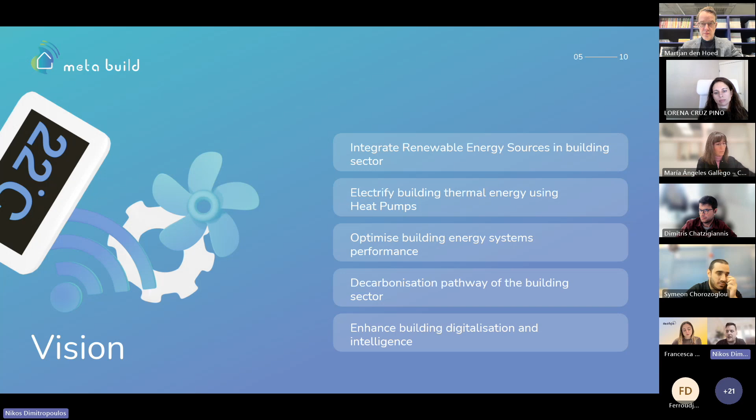Here you can see the consortium. We have representation all throughout Europe. And we can go a bit with our vision. What we try to achieve, in one sentence, is to power the electrification of buildings mostly through heat pump solutions, along with integration of renewables and the accompanying digital solutions. To do this, we optimize building energy system performance. We aim to find pathways to decarbonize the building sector by enhancing building digitalization and intelligence. So we combine hardware and software solutions to do this.

As we are wrapping up our second year and we are a hardware-focused project, here you can see some prototypes of what we are installing in the buildings, along with, on the top left, MPC, model predictive control. So here you see three heat pump solutions. The R290 brine-to-water heat pump on the left corner, on the right corner the dual source sink heat pump, and above the R290 monoblock unit. These are just 3 out of the 6 heat pump technologies.

You also see the photovoltaics, the renewable solutions that we are utilizing, PVTs with direct lamination and air-based PVTs, and the second life batteries. So this is just a glimpse of what we are installing in the project, in the pilot buildings, the front runners and the replicators, to electrify buildings.

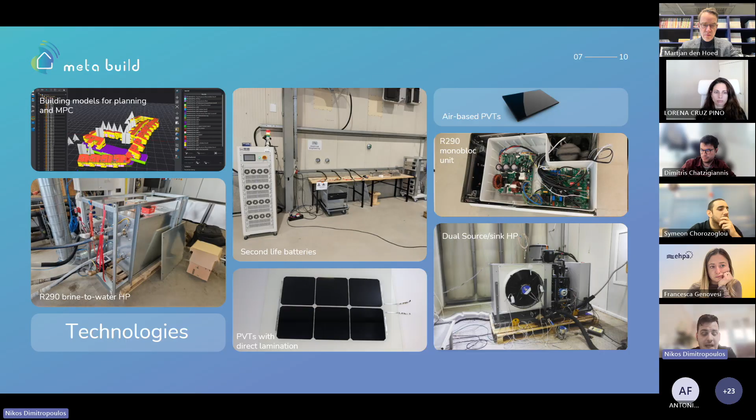To finish up this very, very brief introduction, to understand the scope, I'll guide you through our front runners, their cases. The first one in Austria is a renovation multifamily row house in Vienna, Austria. We combine heat pumps with electric energy storage. The second one is a residential building with 130 apartments in Croatia, where we connect the heat pump solution with the existing district heating network.

The third one in France, a renovation building in a historical landmark, where we install a cascade of heat pumps to electrify the gas boilers. The fourth one in Greece is about construction and renovation, where we'll deal with demand response schemes in the new construction building and the renovated ones. The fifth one in Italy is also renovation, again, a very old building from the 1700s, if I'm not mistaken, many years ago. Multifamily buildings where we install the heat pump solution that you saw before, the monoblock unit.

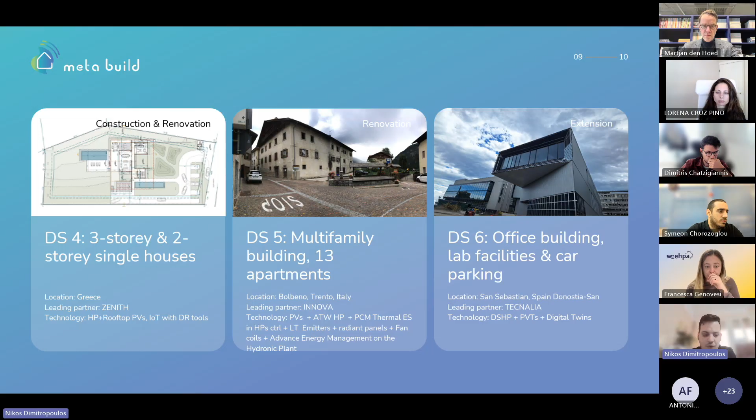And the sixth one is an extension, the tertiary building, the offices, in Spain, in San Sebastian, where we extend this tertiary building with the dual source heat pump in order to provide electrification solutions through thermal and air, how the heat pump works. And here is the rest of our pilot sites, the 7 replicators, in which all of the solutions that we apply firstly in our 6 front runners, we will aim to replicate, to install again, in order to proceed with the replication, the affordability, and the potential scalability of what we are offering.

Later on, you'll have the chance to hear about some of these things that we are doing within the project on the AI side of things. So this is how we combine the hardware solutions, the electrification of buildings, and we accompany it with digital solutions, with data-driven approaches to support electrification and decarbonization of buildings.

Thank you very much. I think I'm just right on time. You are, Nikos, thank you.

And now I would like to give the floor to Simeon, that I would like to introduce before starting the presentation. So Simeon is a data scientist and a researcher at the National Technical University of Athens, and he will present indeed the technology that Nikos has just mentioned. He's a researcher and a PhD candidate in digital energy systems, buildings, and AI, delivering solutions across the energy value chain. And basically, I can now give you the floor. So please.

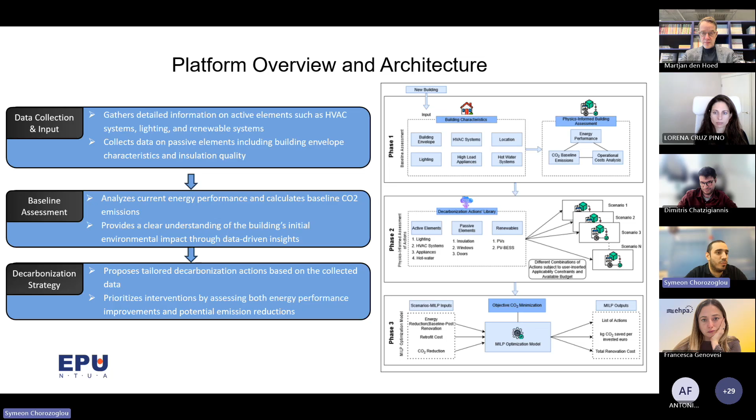technical constraints and financial constraints, since there might be a certain amount of space where we can install photovoltaics, or the user may have a certain amount of budget to dispose for the renovation actions.

And once the user logs in, we enter the first phase of the tool, where the user should enter basic information about the building, for example, the location, some prices regarding this region, like the electricity prices, the gas prices, or the heating oil prices.

We want also the location for one more reason, because we retrieve data like weather data and PV potential from the external PVGIS tool. So the location is a prerequisite for this tool. And in the right side of the slide, you can see an example building in Athens where we ran the experiment. We have also filled information about the available budget and the available space for installations.

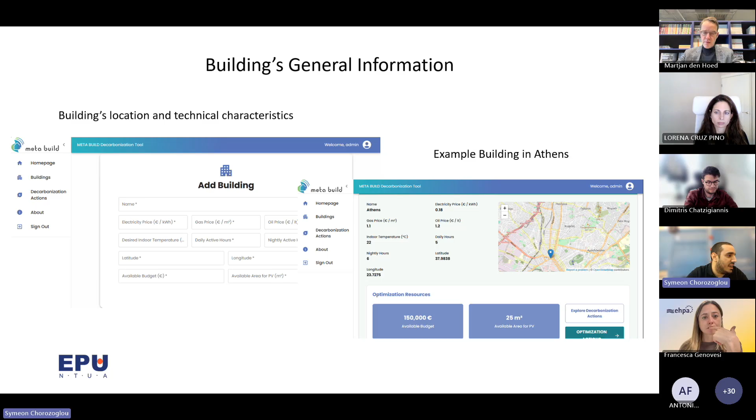Then we proceed to more detailed information about the passive and active elements of the buildings. We want to know the exact status of the building envelope. For example, the walls, the doors, the ceilings, how much area do they take, what the orientation of these elements is, the shading, and some more detailed characteristics like the U value.

The same applies also for the appliances, where we want information like the energy efficiency of the appliances, the weekly hours that the user uses them, information about the lighting systems, and of course heating systems, which is probably the biggest load in a building, where we want to know information like the energy efficiency of this system.

through the physics-informed models, we perform the baseline assessment where we gain insights about the consumption, the emissions, and the operational costs. We also break down this information per category to show exactly how much the appliances are responsible for emissions and energy consumption, how much the lighting system, the heating system, and the cooling systems.

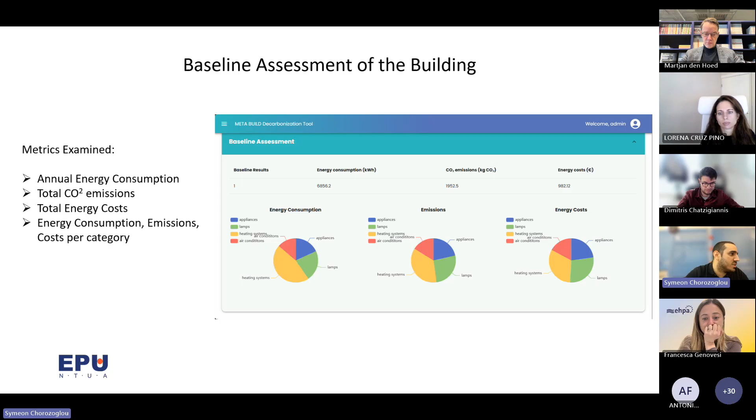And once we perform also the baseline analysis, we proceed to the final step of the tool, where we propose the set of decarbonization actions solving the MILP problem. We prioritize replacement actions from the library we have created, and we propose to the user what exactly should be done. For example, in this case, we should install a heat pump.

With that cost, we should improve the insulation, change the air conditioners, change the appliances with more efficient ones, and change the windows. And after all, we assess again the building with the new values, and we have some visualization in order to compare the pre-renovation and the post-renovation status of the building, how much CO2 emissions will be saved, how much financial savings we will have,

how much these actions actually cost. I want to point out here that we have not included the installation cost because that may vary from country to country. It's only the costs of buying and applying these renovation actions. And finally, we have also the graphs to see the comparison of the pre-renovation and post-renovation.

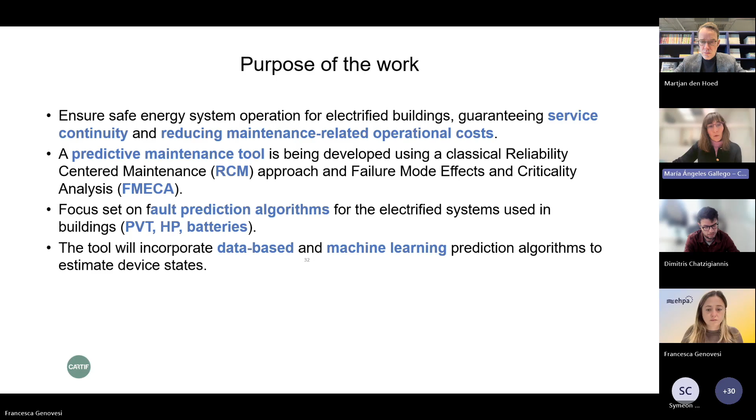So the purpose for the work developed in this task is to ensure safe energy system operation for electrified buildings, so that we are able to guarantee service continuity and to reduce maintenance-related operational costs. So in the end, the final purpose is to develop a predictive maintenance tool within this framework, the reliability-centered maintenance approach, and the failure mode effects and criticality analysis.

So we are setting the focus on some fault prediction algorithms for the electrified systems used in our buildings. In this case, we have some thermal photovoltaics, some heat pumps, and second life batteries. And this predictive maintenance tool will incorporate data-based and machine learning prediction algorithms to estimate device states.

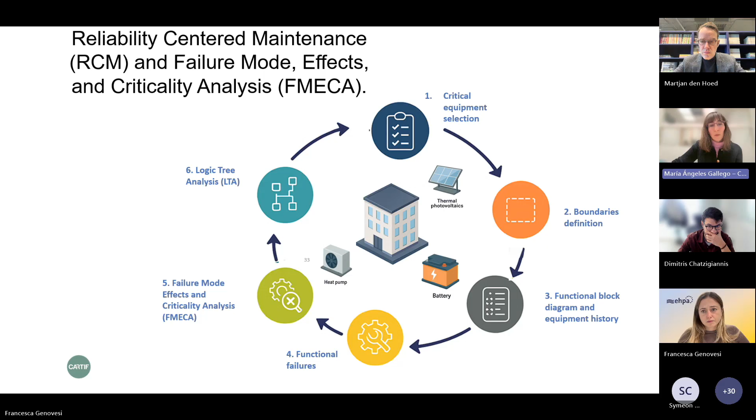So a few words about this reliability-centered maintenance approach. This is a structured methodology and is used often for optimizing maintenance strategies with the objective to improve the reliability and performance of critical systems. Then we are incorporating the failure mode effects and criticality analysis to ensure a thorough understanding of failure behaviors and their prioritization. So as you can see here, there are several steps that we are following with this approach.

First, we have the critical equipment selection. Here, we must include some factors to decide how critical the equipment are. These factors are normally related to the operational importance, safety implications, and also the potential economic impact of the failures. Then, in step 2, we have the definition of the boundaries. Here is when we identify which are the components or subsystems of the equipment which are most critical for the overall system's operation.

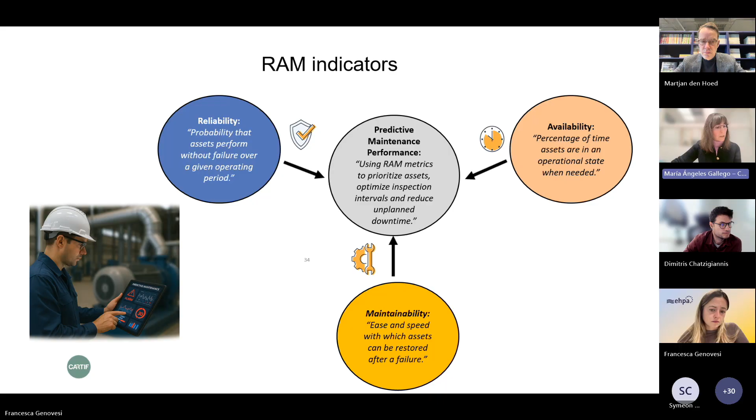Then step number 3, the functional block diagram and equipment history. Here we are including an analysis of how each subsystem contributes to the overall functionality. And here it is important also to map any interdependencies and any links that could amplify the impact of failures in specific components. So moving on to step number 4, the functional failures. Here, for each function identified, we rank the functional failures by the potential to disrupt operations, safety, or environmental compliance.

Then, for the failure mode effects and criticality analysis, here is where we are actually assessing the failure modes, the severity, the occurrence likelihood, and the detection difficulty for each mode. And we are integrating a criticality analysis. For this, we are normally using a scoring system, something like a risk priority number or something similar. So we are incorporating the criticality of each failure mode. We are also considering potential consequences and likelihood of occurrence.

And finally, step number 6, which is the logic tree analysis. Here we are incorporating the results of the previous step, so the criticality assessment. And we have a decision tree, so this allows us to prioritize. Normally, for highly critical failure modes, we should be assigning a predictive or preventive maintenance task. And on the other hand, for less critical modes, it's more common to use corrective or run to failure strategies, if this is always cost effective. So these would be the stages, the steps for this approach.

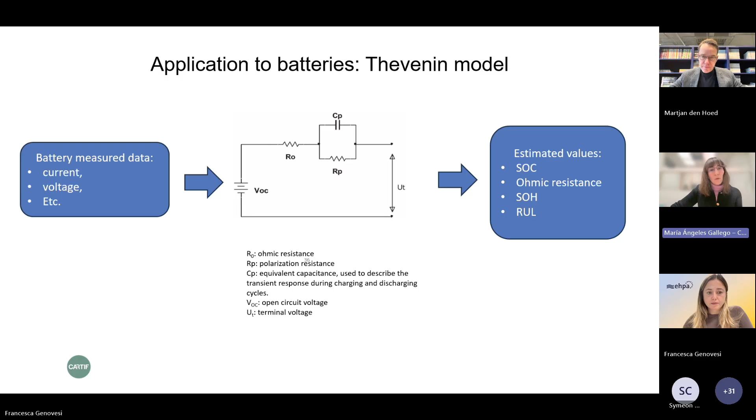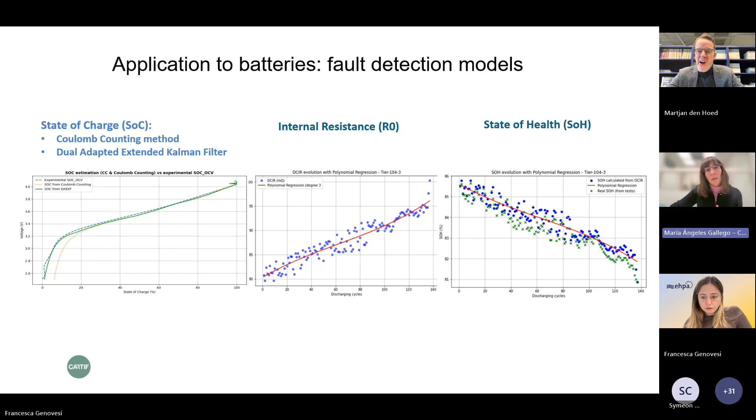So here you can see some results, some graphs from the fault detection models developed so far for estimating these parameters. For the state of charge, we use the Coulomb counting method and the dual adapted extended Kalman filter. Then for the estimation of the internal resistance, we perform a polynomial regression. Also for the state of health, a polynomial regression. This is linked with the internal resistance.

We are applying an isolation forest model to detect abnormal behavior, and this is based on the deviations and trends. First, this isolation forest model will provide us an anomaly score to quantify degradation. And based on this, we are finally calculating a health index, whose value ranges from 0 to 1.

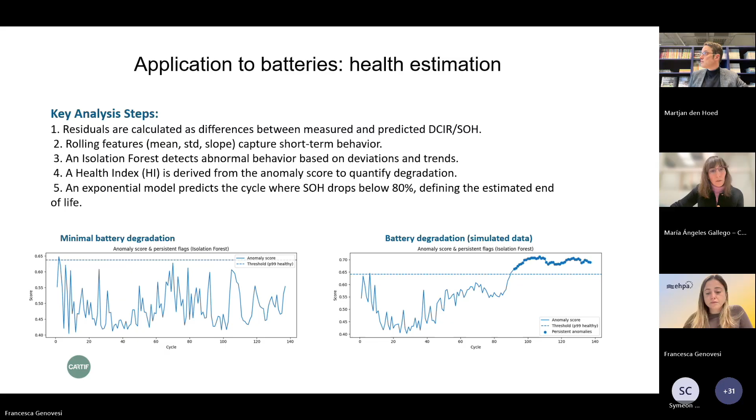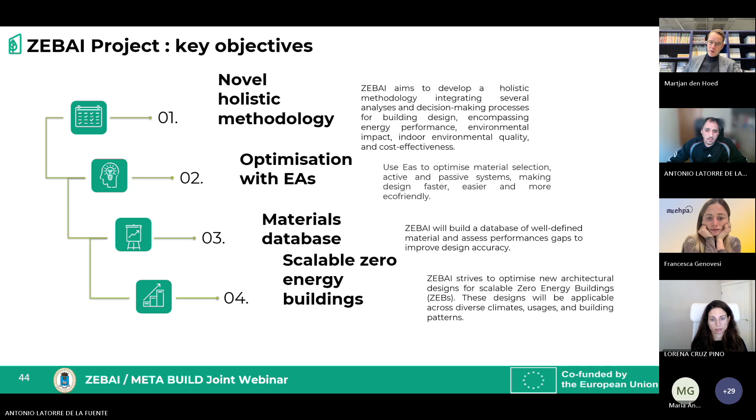So what we want to do is include in this methodology all the knowledge that all these profiles involved in the design of ZEBs can provide. We have architects that define the geometry and select the constructive systems, engineers selecting mechanical systems, sustainability consultants and renewable energy specialists that provide their feedback according to these two objectives.

And in the end, if the designer wants to do so, with all the feedback provided by all these specialists, she can ask for a certification of sustainable building. The problem with this approach is that changes, suggestions made by each of these different profiles can not only affect their own areas of expertise, but other design solutions provided by the other profiles.

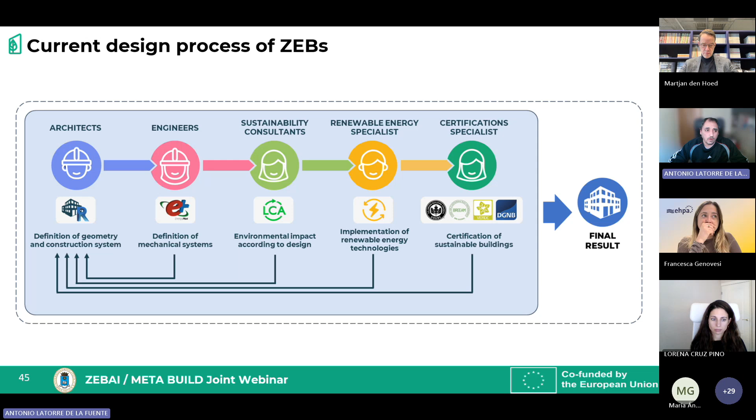So in our project, what we want to do is not replacing these experts, of course, because we need their expertise, but we want to try to propose solutions that encompass all these suggestions simultaneously.

So we take their knowledge to provide the initial definition of the geometry of the buildings. They provide specific requirements of the designs, regulations that are applicable to these particular cases, and they also provide their input on how these objectives that we are considering should be managed.

With all that information, we apply the ZEBAI methodology, we evolve those buildings, and we provide a set of solutions that can then be verified by these experts to make a decision towards the final results. So the idea of the ZEBAI methodology is not replacing expert knowledge, but instead assisting them to make better designs.

We need several inputs from these experts. As I mentioned, the materials and systems catalog. We need to know about regulations of the location in which the building is going to be constructed. We need to get information about the environment and location, for example, the weather profiles for that location. And we also need an initial BIM design to work with.

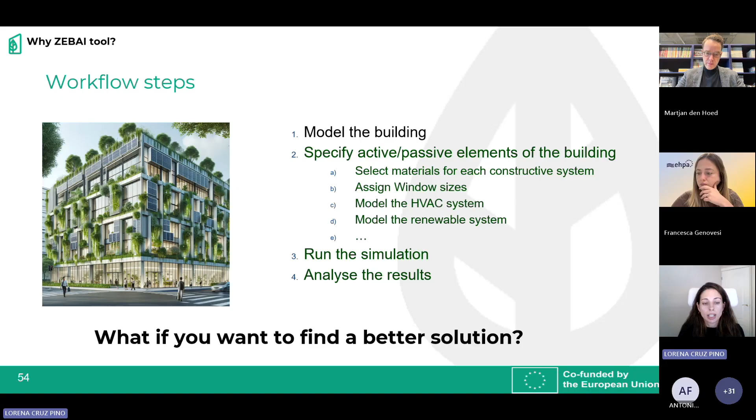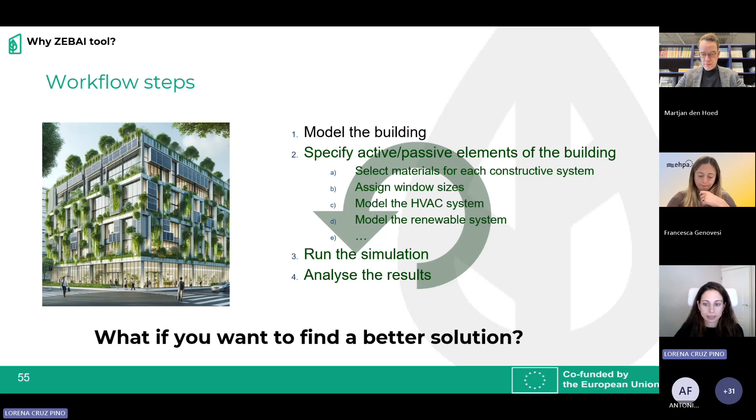But you don't do this just one time, because if you want to find a better solution, because you want to achieve a specific standard or you don't comply with the regulations, for example, this is an iterative task. So this is the thing that we want to do faster and automatically. Because if you want to improve the solution, you have to manually, for example, make the windows bigger or smaller, or you have to manually change the composition of the facade.

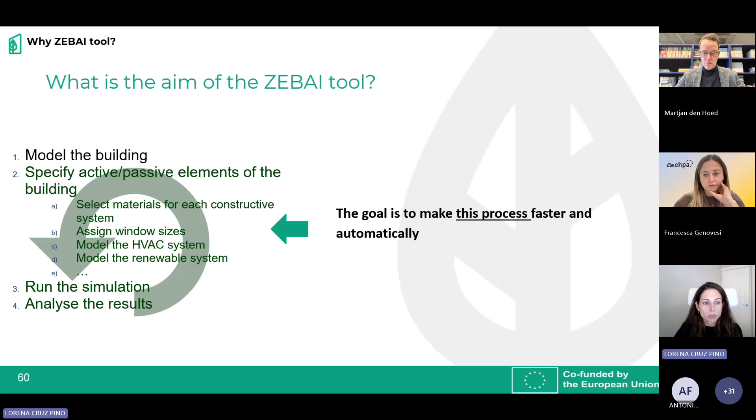So what we want is to do this process automatically. So the tool will generate and evaluate multiple alternatives. And we have included different types of facade. And also we have linked this with the material database, so it automatically generates solutions for all the different constructive systems. And with all these simulators and analyses that we have implemented, the tool will evaluate and will know how good or bad the solutions are.

So it will let you find the best solutions possible, given your objectives, because you will let the tool know what is more important for you within all the objectives that we have integrated. And now that you know better what the goal of the tool is, I'm going to present you a short demo.

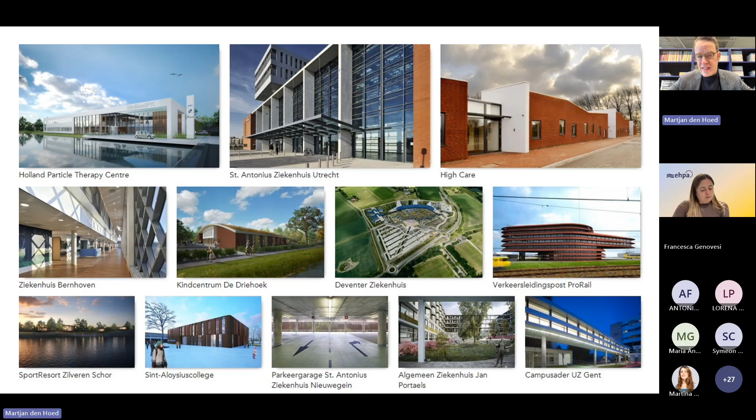We have an office in Brussels, and these are all design experts, and they are really eager to have new ways of working within the projects. Our projects have a focus on complexity. Hospitals have a certain amount of complexity, involving all kinds of aspects which need to be taken care of. And AI is really promising and really making things possible for our future, as we see it.

But I want to have one slide, and then we can dream on about all the other things. I want to have one slide where I can point out a couple of points to be aware of. Creativity is really important for our industry, at least, and it helps us to think about solutions which weren't thought about before, and to combine different kinds of solutions, and that gives a freedom. And what happens if an AI tool takes this over, and will people still be able to think outside of the box?

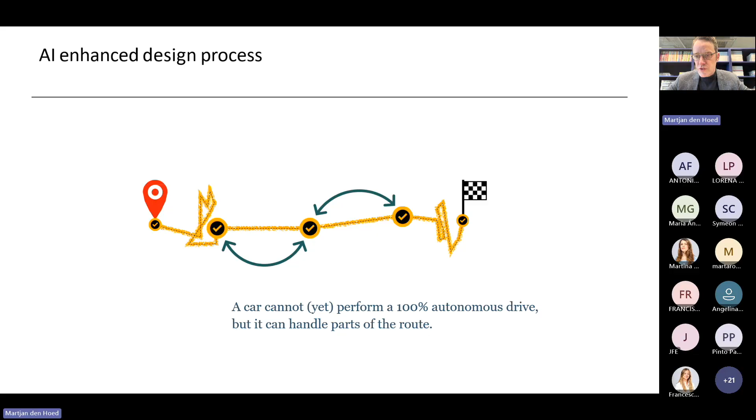For our methodology, we see AI as a part of a route. So when we have a design process, some small parts of the route still can't be done with AI, but like driving a car on the highway, it could already autonomously drive certain parts of the route, and that's how we see AI in our office as well. So when we are involved in a project, an architect is involved early in the design stage, where people are only thinking of how many rooms or how many square meters they want in their project, and then we stay on until it's built. And there are a couple of moments where ZEBAI could help us.

So in the early design stage, you are thinking about building characteristics in terms of structural choices, like do we want a concrete building frame, or a wooden building frame? And then later on, you will think of finishes, and mostly both materials are general. And then later on, during construction, they are chosen to be specific. So we have different levels where ZEBAI could help us identify the right choice of materials. And therefore, this database or catalog, which Antonio and Lorena already mentioned, is really helpful.

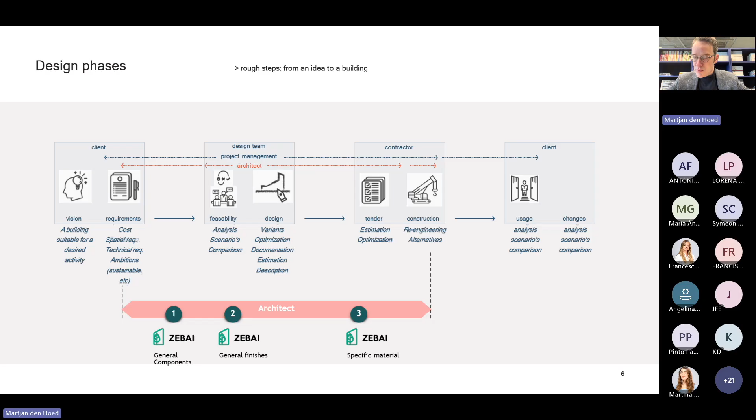So within the design stage, we have multiple phases: a schematic design, a design development and a technical design, and all these phases have their different level of detail. And within this level of detail, it's really important that we don't get too detailed information at the early design phase, and don't get too rough information either, because otherwise a tool like ZEBAI couldn't calculate the right answer for us.

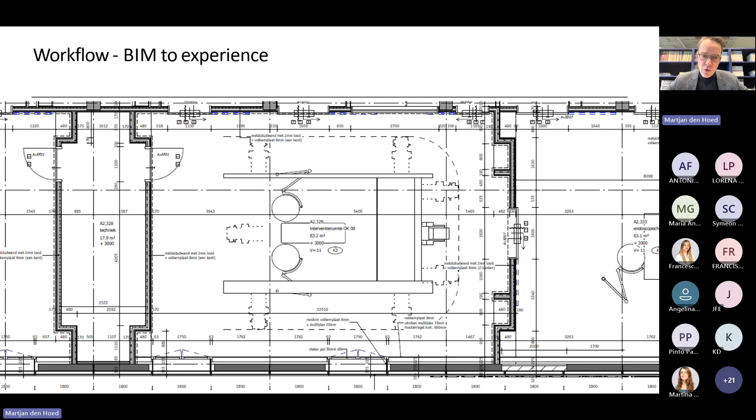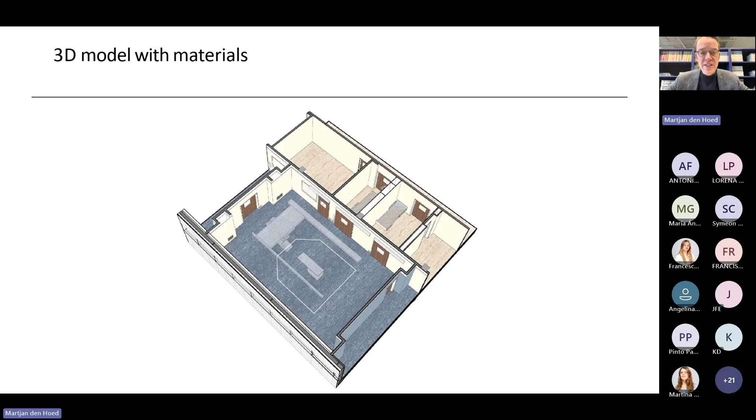Our way of working is to work together with clients. So here you see one of my colleagues next to the screen working with end users. This is in a hospital, and he is making a design proposal. This design proposal is mostly a technical drawing, but this same technical drawing can be presented in different ways. You could also see it as a 3D model, and you can also give it materialization. And with this materialization, you could also make a visualization.

So these are different kinds of views of the same information. And we also do this with huge groups, giving people a VR headset, and they can experience the scale and also a bit of the materialization. So this is how we used to work.

And within the design process, we have a loop, and it's a typical design phase. It mostly takes 3 months, and you have these small loops, and the choice of material is also a small loop within this loop. And as long as it's not the right outcome, we go back, until it's more or less final enough for that stage, and then we go on to the next phase.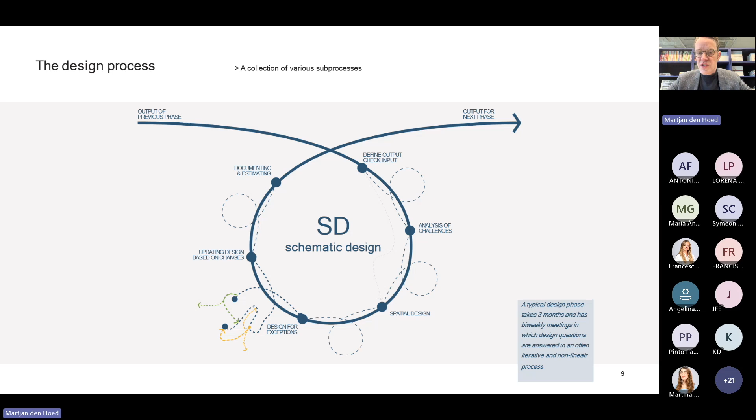And with ZEBAI, we dream of a tool which helps us with some kind of presets. So, for example, when we have a building with already some background of choices which are already made for other buildings, then you want to repeat that same preset of selection, like you want to have a nature atmosphere, or you want to have building characteristics like the U values, etc. So all these presets would really help us to do this.

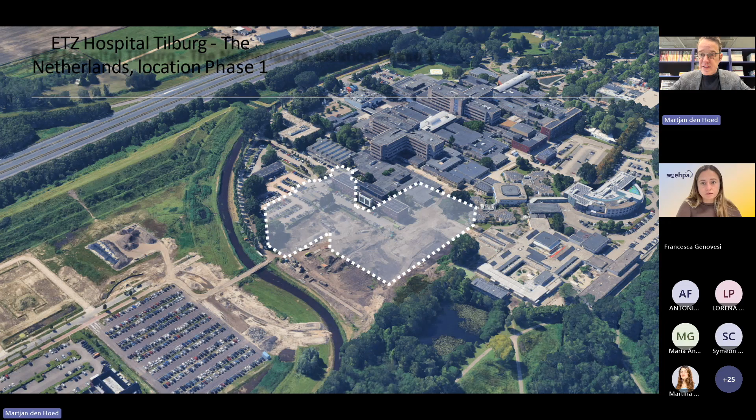And this is the first phase of hopefully many to come. So this first phase is where we focus on. And now our client is really interested to use ZEBAI already for the preparation for the second phase. We are currently starting the second phase for this hospital, and then we would be interested in how ZEBAI could help us with the outcome of this project.

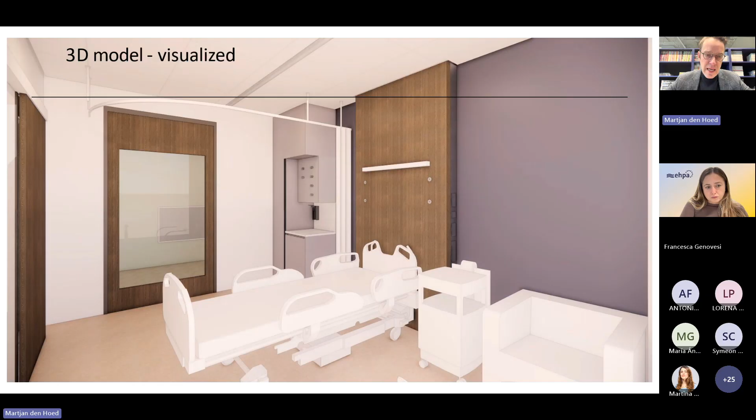So when designing a project, you have this no-material 3D model, and you want to enhance this model with materialization, also towards a detail where it almost looks realistic. And this is what our client is mostly interested in. But on the other hand, there are a lot of choices in the background, like cost and environmental impacts, like availability within your neighborhood. And that's where this material database or catalog of ZEBAI is really helpful.

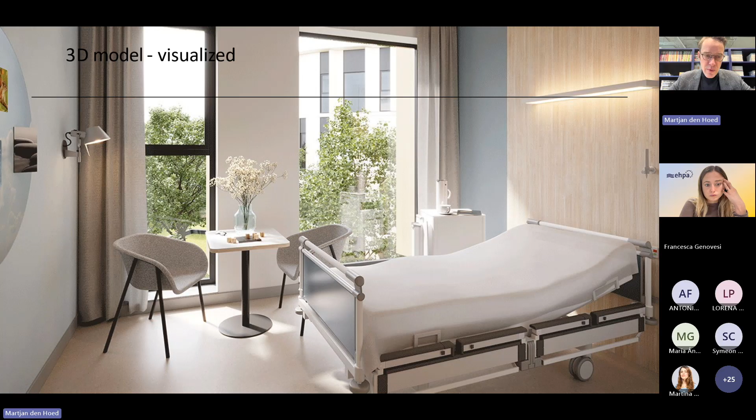So to come back to the scalability, that was also why this project is really promising. These two projects, phase 1 and phase 2, are also part of a larger project where all these buildings are being replaced in the near future. So this is a route between now and 2050. And all these buildings will be designed in the next years. So therefore, ZEBAI would be really helpful for us. And we are really looking forward to be involved in such a project and use these tools with all the knowledge which all these professionals here have.